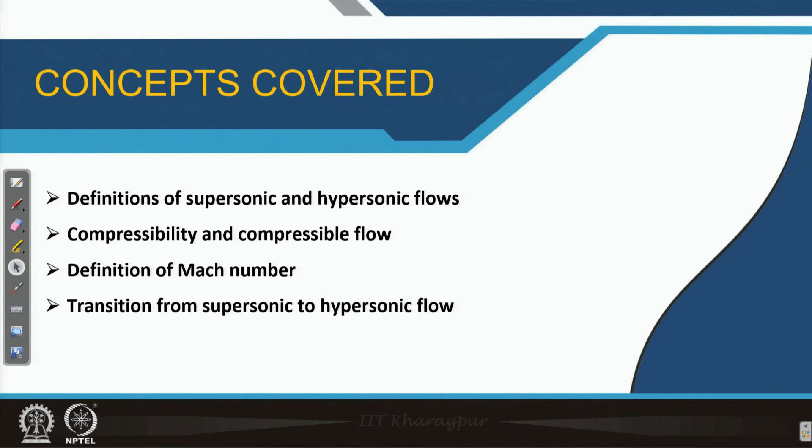A very warm welcome to this new NPTEL course, Fundamentals of Supersonic and Hypersonic Flow. In the first lecture, we will be talking about introduction to supersonic and hypersonic flow. The concepts that we plan to cover include definitions of supersonic and hypersonic flows, compressibility and compressible flow, definition of Mach number, transition from supersonic to hypersonic flow.

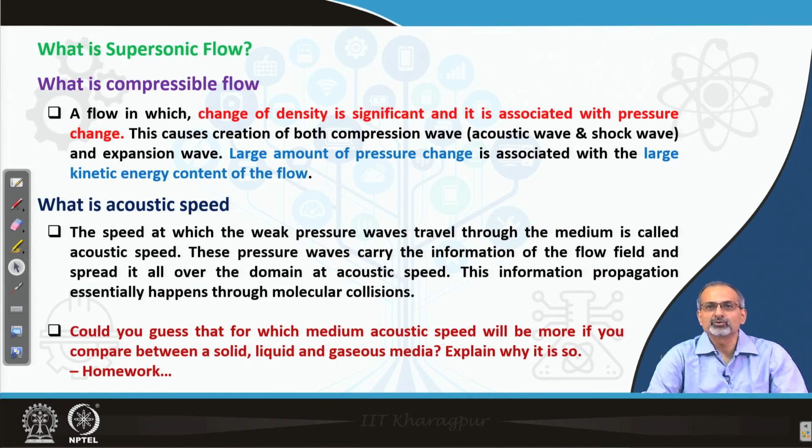Pressure waves are formed due to this information propagation which move in all directions, but most importantly they move upstream at the local acoustic speed. And why we say most importantly is because these molecules which move upstream would end up interacting significantly with the incoming flow, which also comprises a large number of particles. The acoustic speed depends on the temperature of the gas, as that dominates the translational motion of the molecules.

Now, when this upstream moving wave front meets the downstream moving supersonic flow, and we say that the flow velocity capital U is greater than A being the acoustic speed, the pressure waves tend to coalesce and create a strong compression wave, and that strong compression wave is essentially the shock wave that we talk about, and it lies somewhere ahead of the body.

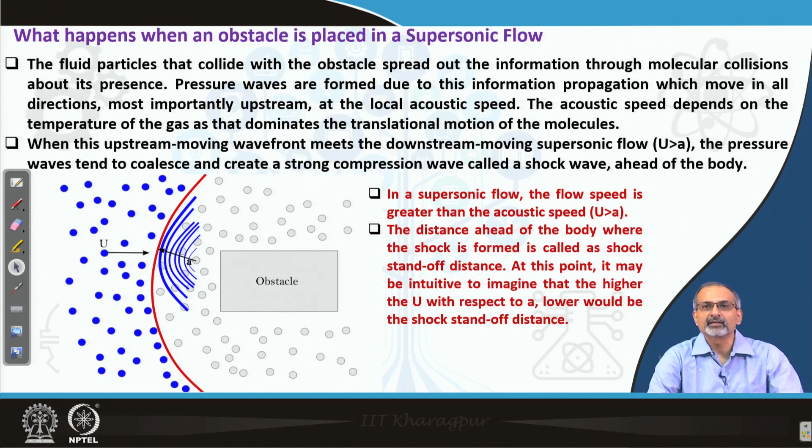Let us talk briefly about compressibility effects. So, we will represent compressibility through a nomenclature tau suffix beta, and this will essentially tell you about the fractional change of specific volume of a fluid element due to high applied pressure change. Inverse of compressibility is known as bulk modulus, which is denoted by K.

So, the actual volume v is positive, but del v del P will turn out to be negative, because if you increase the pressure, which means the delta P is positive, then you will have a decrease in volume, which means the delta v will be negative, and therefore, a negative value of the derivative will be multiplied with the minus 1 by v, giving you finally a positive value of tau beta.

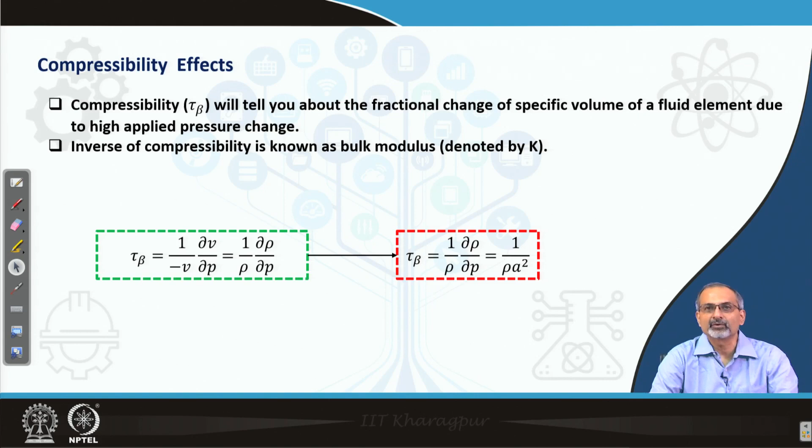So, you may try to look up your earlier course lessons of compressible flow and then try to figure out how we can replace that derivative by 1 by A square. So, that is another small homework problem for you.

We move on to another very important topic which will remain with us all through the course, that is Mach number. Mach number is a non-dimensional number of enormous relevance in compressible flows, and it tells you about the domination of fluid particle inertia force over elastic force. Elastic force of fluid flow is responsible for propagation of pressure waves across the medium through the molecular collisions.

So, the definition of Mach number given by capital M is under root inertia force by elastic force, and then inertia force is represented in terms of the density times area times square of the velocity, and the elastic force is represented as a product of K and area.

And then if you try to replace K by rho times del P del rho, which is based on the discussion that we had regarding tau beta and the fact that K is inverse of tau beta, then you find that the expression basically simplifies to under root U square by A square, and then we essentially simplify it further and write it as U by A.

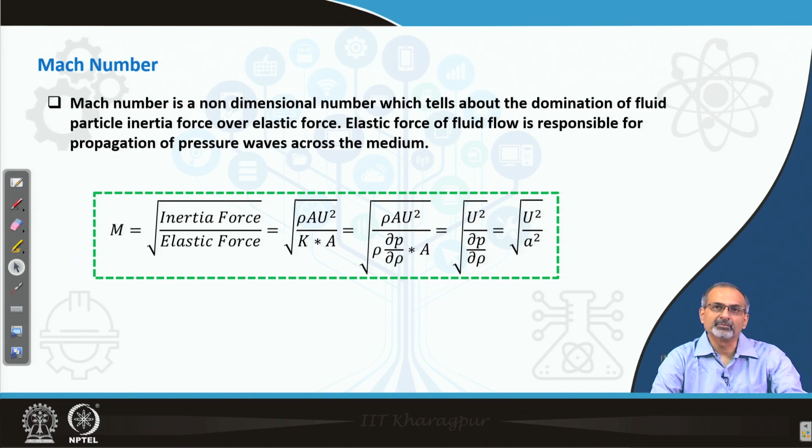We earlier asked the question of what is supersonic flow, and in this course, since we are going to study both supersonic as well as hypersonic flows, we come up with this next question: what is hypersonic flow? Let us try to answer that question. Hypersonic flow is essentially the gateway from aeronautics to astronautics.

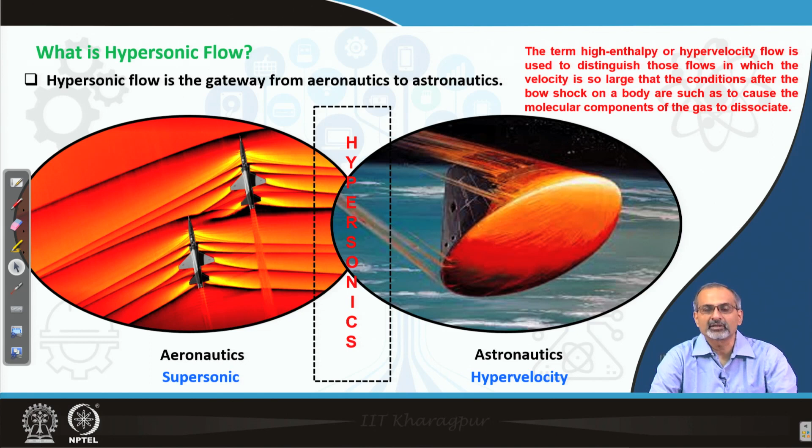The transition from supersonic to hypersonic flow, if we were to try categorizing this, which we were trying to address intuitively in the previous slide, is that in compressible flows there will be an interaction between kinetic energy and internal energy of fluid particles. When the interaction is large, it can cause the excitation of vibrational energy modes, dissociation, recombination, chemical reactions, and even ionization of fluid molecules. Then the flow is said to be hypersonic.

The ionization part, though, will strictly be categorized more as a hypervelocity flow. So, we find that first of all there is excitation of vibrational energy mode, which we do not see at the lower supersonic Mach numbers. We are talking about dissociation of the gas molecules. We are talking about recombination of dissociated atoms. We are talking about chemical reactions due to the extremely high temperatures which exist in such flows. So, there are a lot of changes which are coming up in the flow field which help us to distinguish it from a typical supersonic flow.

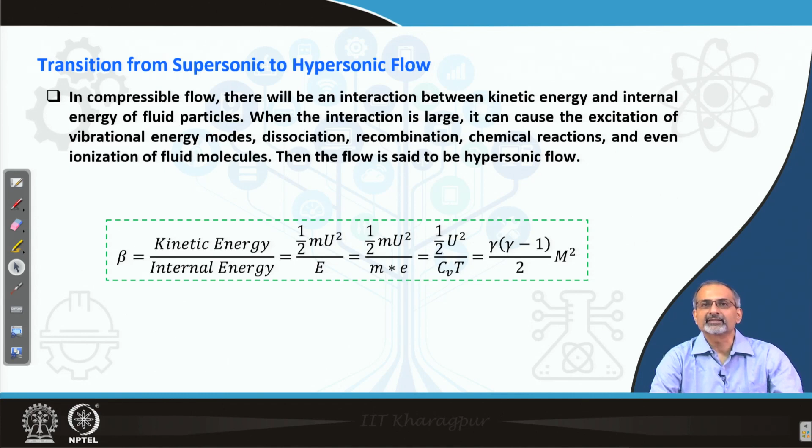When beta increases from small to large values, then we see changes occurring in the medium, changes occurring in the flow, and this is something that we have started talking about since the last 2 or 3 slides. We see at the supersonic regime excitation of both translational and rotational energy modes within the molecules, but vibrational energy mode is not excited in that state. However, as we move from the supersonic to hypersonic regime, we see excitation of vibrational energy modes, and then gradually at the higher hypersonic Mach numbers, dissociation, recombination and associated chemical reactions occur, and some of these phenomena may be occurring at equilibrium conditions, while others may not be working at equilibrium conditions, and then we have to account for non-equilibrium effects.

Further, excitation of electronic energy modes causing ionization is something that is going to occur at the intersection of hypersonic and hypervelocity flow regimes. So, when the flow turns gradually from hypersonic to hypervelocity, then we see that the gaseous medium starts showing the effect of ionization. That means formation of plasma. Now, the word hypervelocity helps us to classify based on the velocity ranges that we are talking about. The word astronautics helps us to classify based on the application.

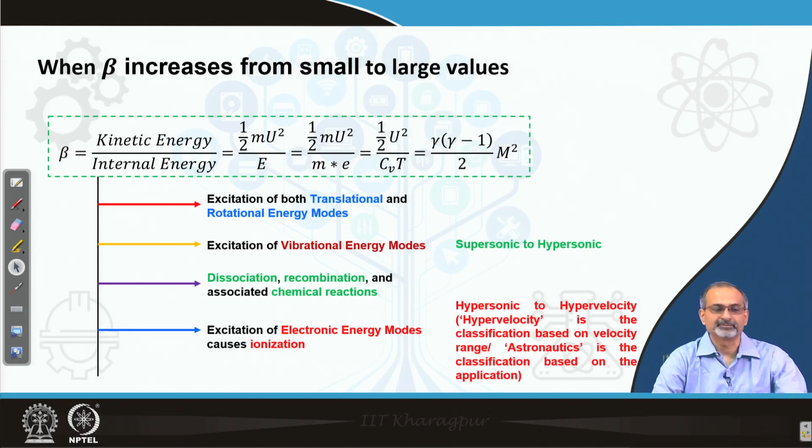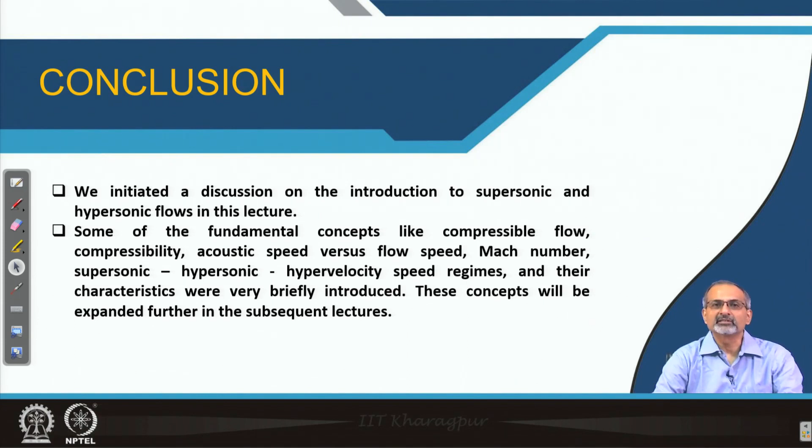We now conclude by saying that we initiated a discussion on the introduction to supersonic and hypersonic flows in this lecture. Some of the fundamental concepts like compressible flow, compressibility, acoustic speed versus flow speed, Mach number, the supersonic to hypervelocity speed regime changes, trying to identify the characteristics of different speed regimes, and the associated changes which happen within the molecular levels were briefly discussed and introduced in this lecture. Now, these concepts will be expanded further in much greater details in the subsequent lectures as we move along with the later lectures of the course.